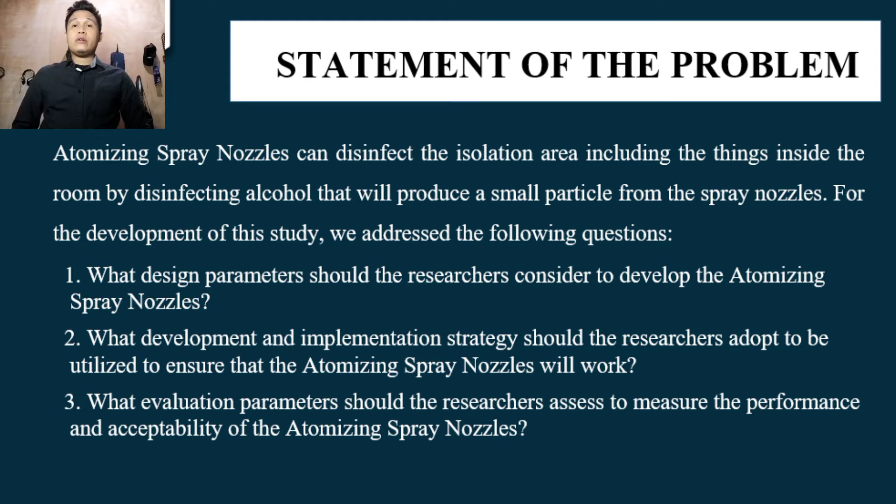Statement of the problem. Atomizing spray nozzle can disinfect the isolation area, including the things inside the room, by disinfecting alcohol that will produce a small particle from a spray nozzle.

For the development of the study, we address the following questions. What design parameters should the researchers consider to develop the atomizing spray nozzle? Number 2, what development and implementation strategies should the researchers adopt to utilize to ensure that the atomizing spray nozzle will work? And number 3, what evaluation parameters should the researchers assess to measure the performance and acceptability of the atomizing spray nozzle?

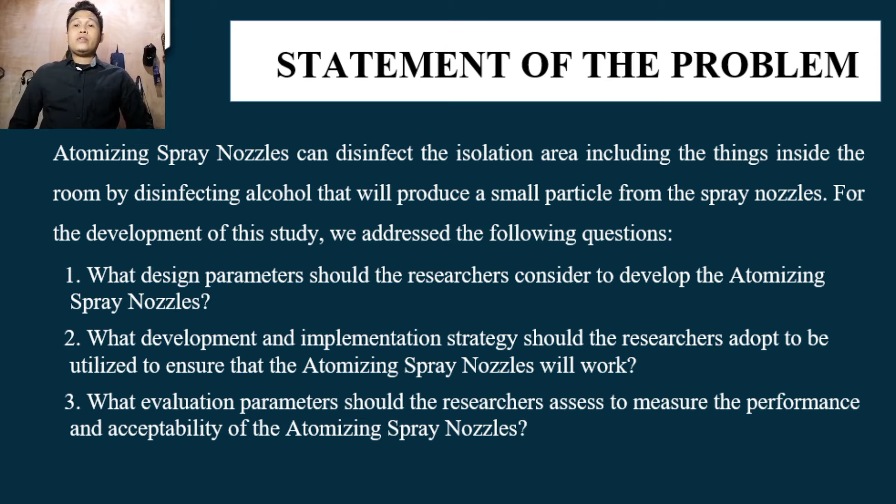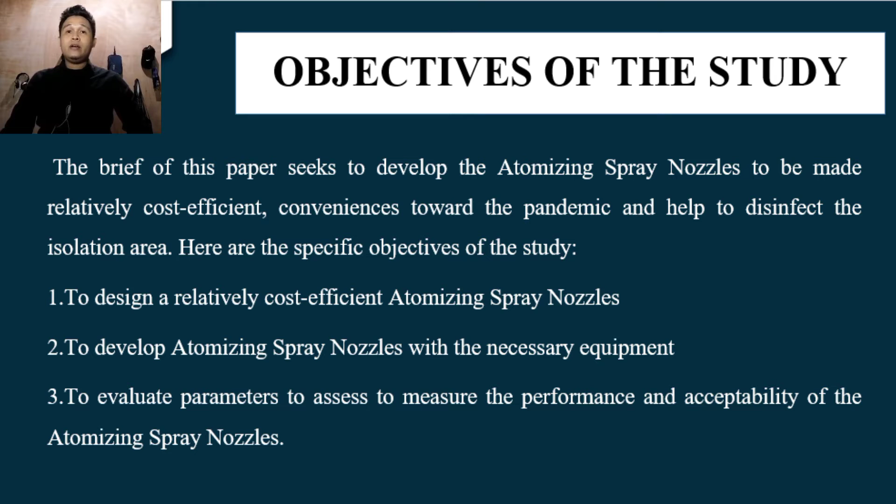Here are the specific objectives of the study. Number 1, to design a relatively cost efficient atomizing spray nozzle. Number 2, to develop the atomizing spray nozzle with the necessary equipment. And number 3, to evaluate parameters to assess and measure the performance and acceptability of the atomizing spray nozzle.

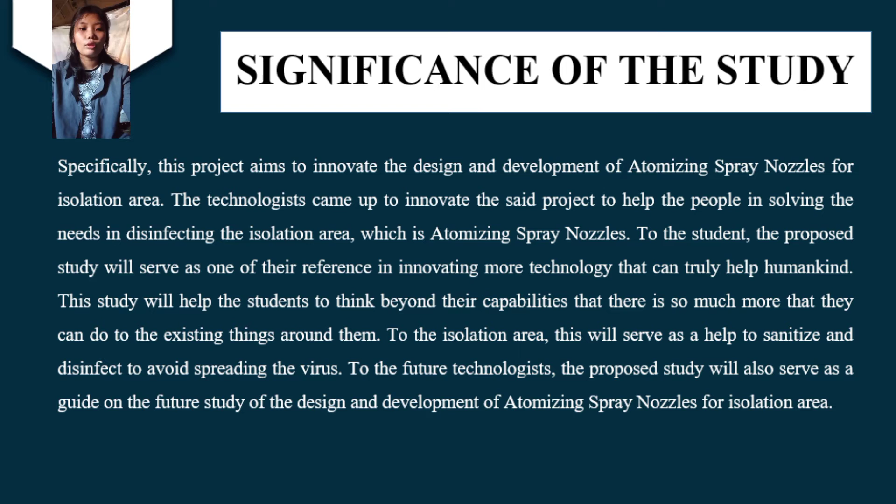Significance of the study. Specifically, this project aims to innovate the design and development of atomizing spray nozzles. The technologists came up to innovate the said project to help people in solving their needs in disinfecting the isolation area. To the students, the proposed study will serve as one of the references in innovating more technology that truly helps humankind. It will help students think beyond their capabilities, that there is so much more they can do with the existing things around them.

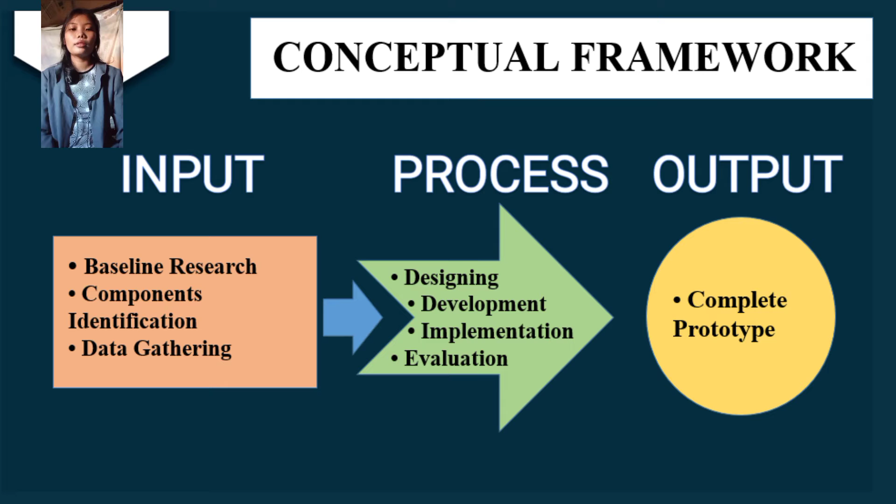Conceptual framework. We have 3 stages: input, process, and output. For the input, we have baseline research and data gathering. For the process, we have design, development, implementation, and evaluation. And the output is our complete prototype.

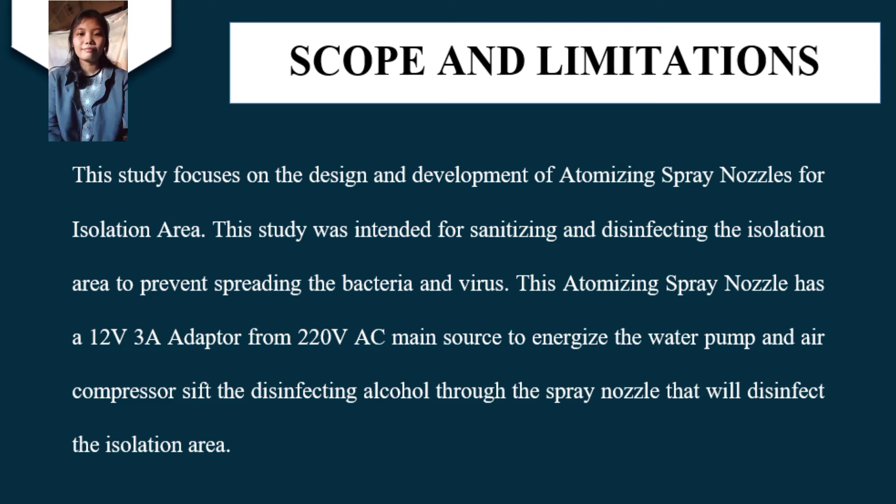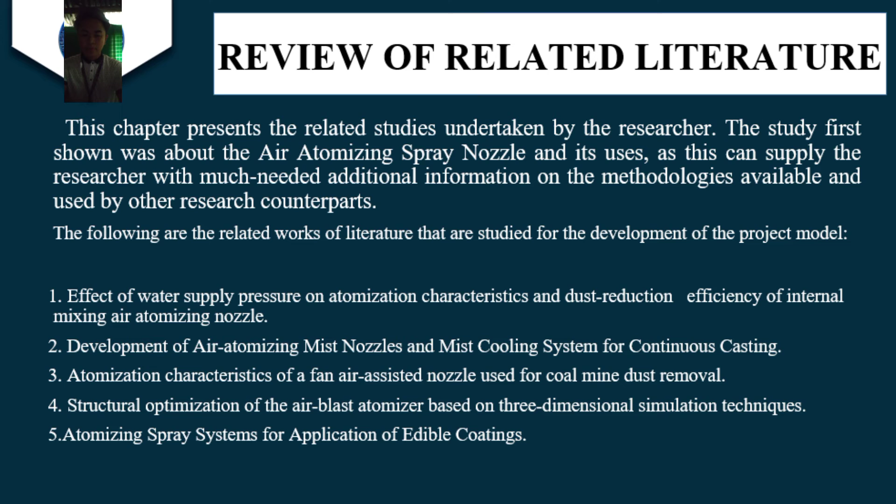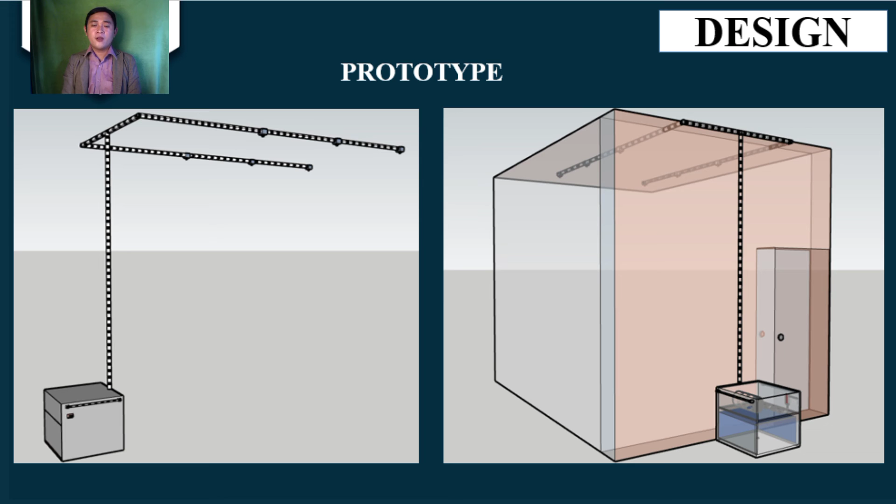This is the design of the prototype. The figure on the left side is the design of the atomizing spray nozzle, while on the right side is how the atomizing spray nozzle will be installed in the isolation room area.

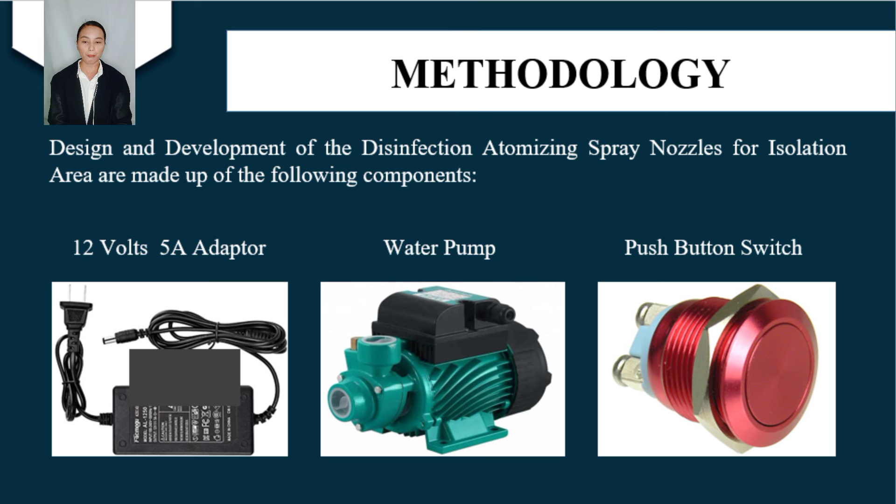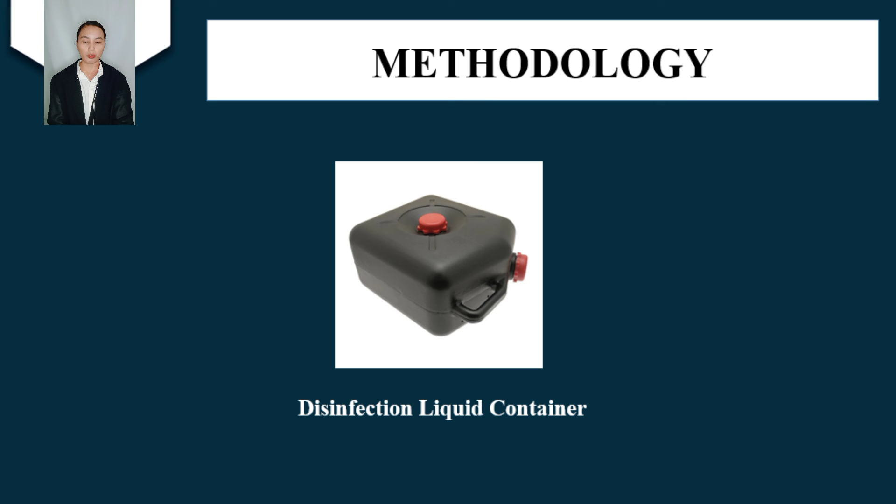Let's talk about the methodology. Design and development of the disinfection atomizing spray nozzle for isolation area is made up of the following components: a 12 volts 5A adapter, water pump, push button switch, air compressor, air atomizing spray nozzle, PVC small tube hose, and disinfection liquid container.

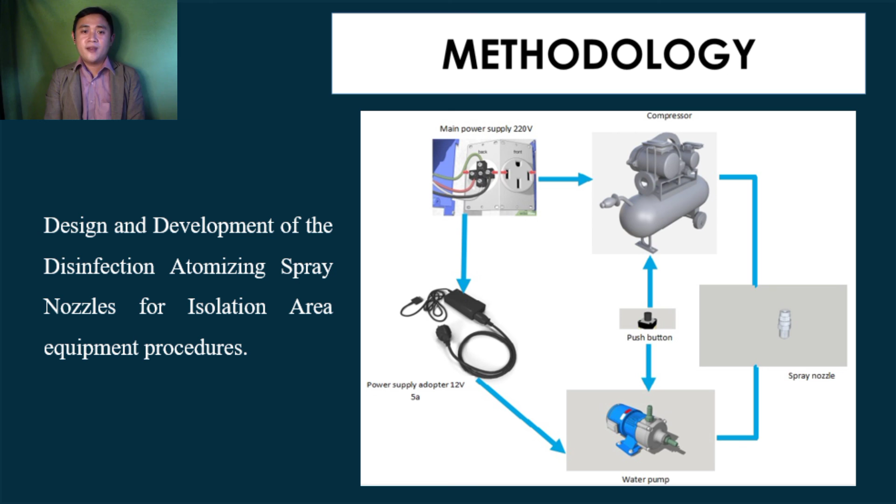Design and development of the disinfection atomizing spray nozzle for isolation area: equipment procedure. The push button will energize both the air compressor and water pump with the power supply of 220 volts and the support of a 12 volts adapter to minimize the higher voltage of the 220 volts. By that, the disinfection liquid will flow into the atomizing spray nozzle.

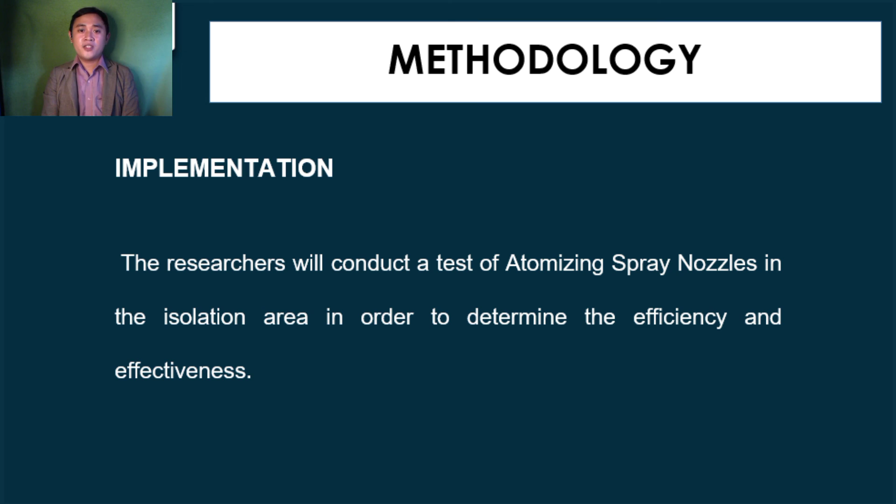Implementation: the researchers will conduct a test of the atomizing spray nozzle in the isolation area in order to determine the efficiency and effectiveness. Evaluation: the researchers will have a rubric to assess the performance and acceptability of the atomizing spray nozzle, and this rubric will be evaluated by the faculty of the isolation area.